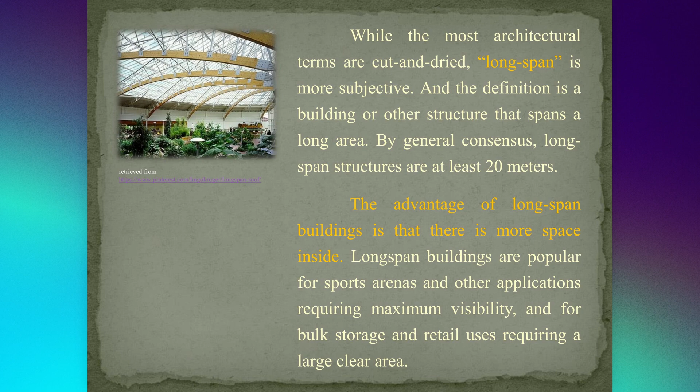Due to the nature of long-span construction, the construction materials, including framing members and trusses, are oversized and require special care for installation. Long-span structures may need bracing during craning and construction to keep the materials true. Before constructing a long-span structure, make sure the contractor and building installation crews have experience working with buildings of a similar size.

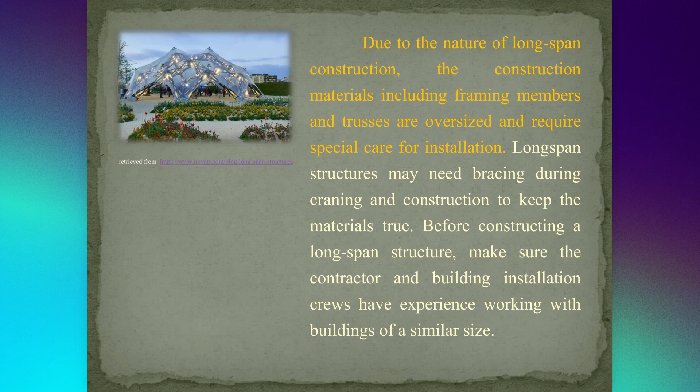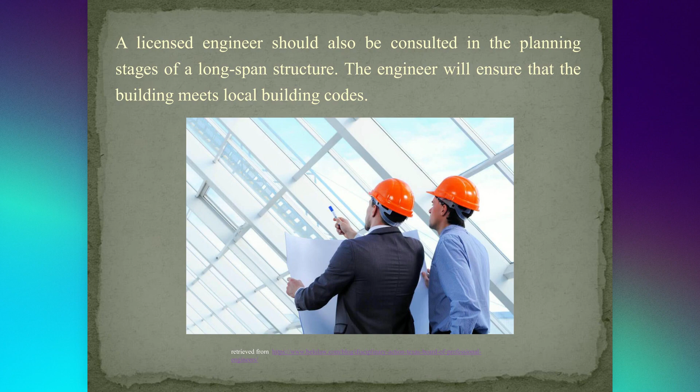A licensed engineer should also be consulted in the planning stages of a long-span structure. The engineer will ensure that the building meets local building codes. Designing long-span structures requires an obsession with stability. Certainly, the structure has to hold up its own weight. Just to span the required distance, a structure has to support the significant dead load.

But the complexity of a long-span design increases exponentially when snow load, wind load, seismic load, deflection, serviceability, and the dead weight of the floor or roof system are all factored in. Architectural appeal drives the design of such structures, but many factors, working simultaneously and in varying degrees, must be analyzed in long-span design.

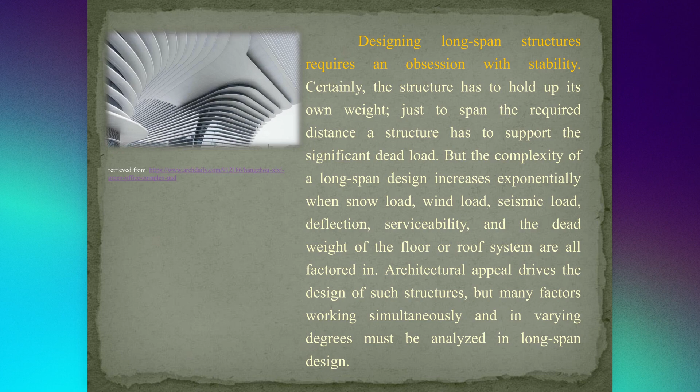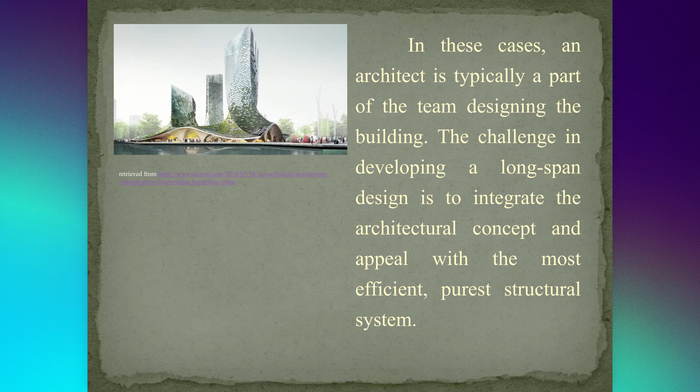In these cases, an architect is typically a part of the team designing the building. The challenge in developing a long-span design is to integrate the architectural concept and appeal with the most efficient, purest structural system. Relevant questions include: what are the site constraints? Should the pieces be pre-assembled or must the structure be stick-built?

What type of temporary support is needed? What is the nature of the field connections? What is the inherent stability of the elements during assembly? How will differential deflection impact the structure? How can load be transferred from temporary shores to the permanent structure?

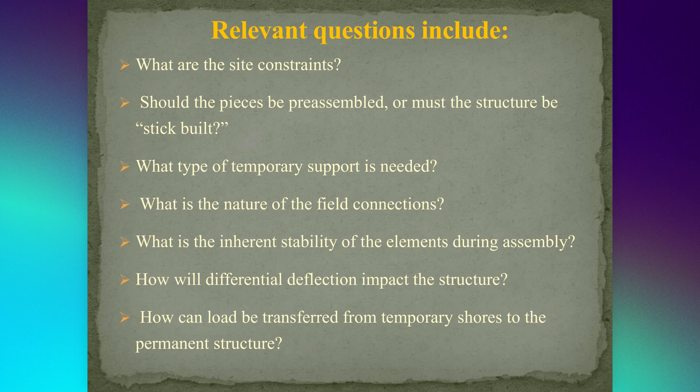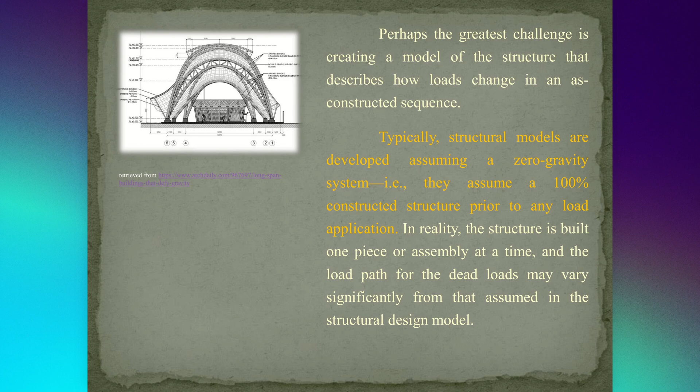Perhaps the greatest challenge is creating a model of the structure that describes how loads change in an as-constructed sequence. Typically, structural models are developed assuming a zero-gravity system, i.e., they assume a 100% constructed structure prior to any load application. In reality, the structure is built one piece or assembly at a time, and the load path for the dead loads may vary significantly from that assumed in the structural design model.

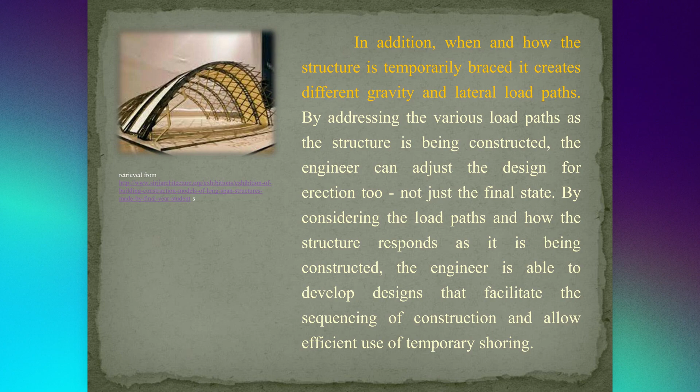In addition, when and how the structure is temporarily braced, it creates different gravity and lateral load paths. By addressing the various load paths as the structure is being constructed, the engineer can adjust the design for erection too, not just the final state. By considering the load paths and how the structure responds as it is being constructed, the engineer is able to develop designs that facilitate the sequencing of construction and allow efficient use of temporary shoring.

Addressing instability issues that occur during construction impacts member size, temporary shoring requirements, and construction sequencing, all of which have a significant impact on overall project cost and schedule. Certain construction materials are better suited for long-span structures. Long-span structures must be made of materials light enough not to require interior support, yet sturdy enough to withstand the pressures placed on the structure.

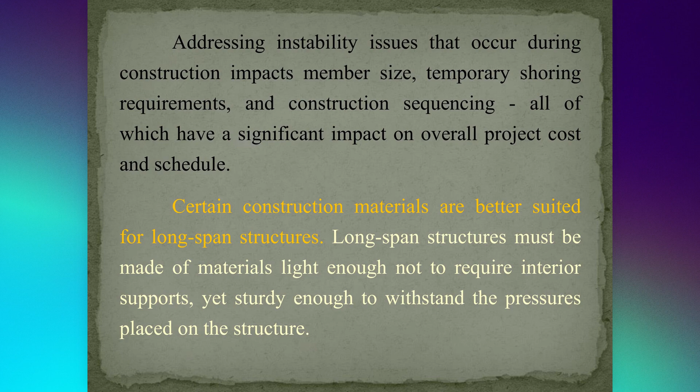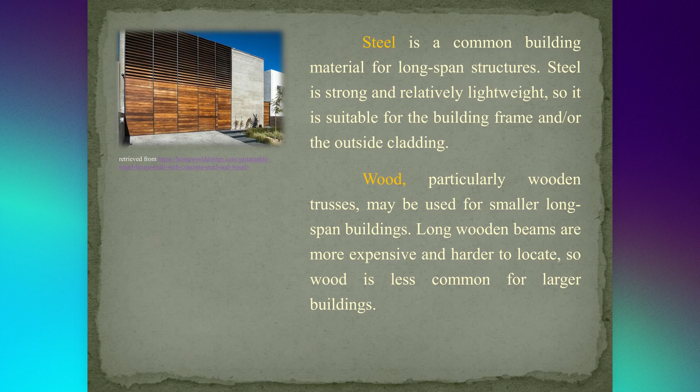Steel is a common building material for long-span structures. Steel is strong and relatively lightweight, so it is suitable for the building frame and/or the outside cladding. Wood, particularly wooden trusses, may be used for smaller long-span buildings. Long wooden beams are more expensive and harder to locate, so wood is less common for larger buildings.

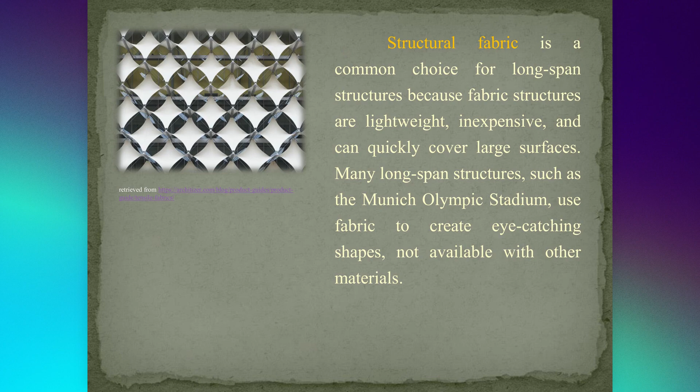Structural fabric is a common choice for long-span structures because fabric structures are lightweight, inexpensive, and can quickly cover large surfaces. Many long-span structures, such as the Munich Olympic Stadium, use fabric to create eye-catching shapes not available with other materials. Glass curtain walls on non-load-bearing walls provide a unique appearance and unite the inside and outside of the building.

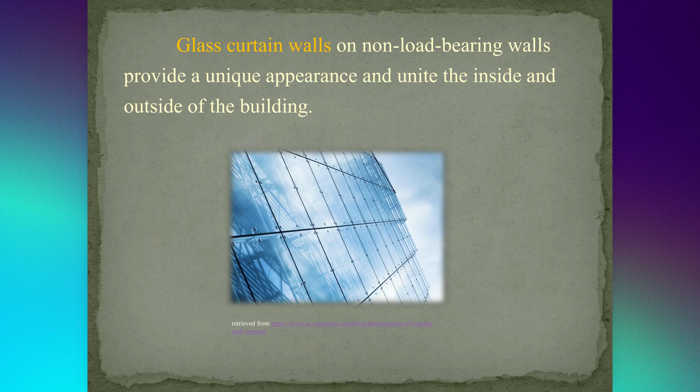There are a few important construction aspects to consider while building long-span structure-based bridges. Choosing the most appropriate method of erection. The choice of the method depends largely on the type of landscape, the depth of water bodies involved, and the distance to be covered. The type of foundation. This generally depends on the geotechnical condition of the region as well as environmental factors, such as the maximum wind speed and air pressure at the highest point.

The need for the construction of substructures. This can help to minimize the construction cost and time in a considerable manner besides enhancing the quality of the structure and workplace safety. The use of the right tools and technology. Since constructing bridges is quite unlike constructing buildings and other structures, the tools and techniques used here differ significantly and play a vital role in ensuring the safety and long life of the structure.

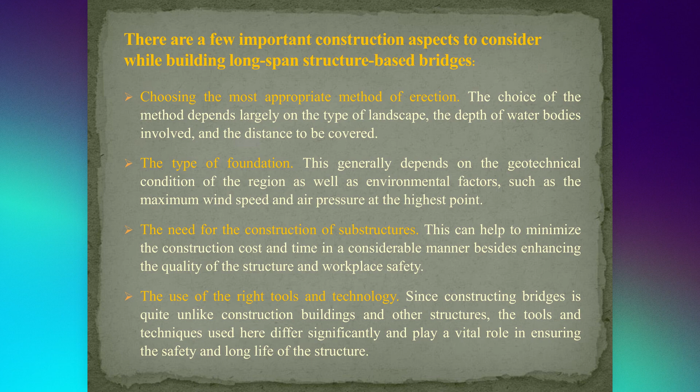It is also important to consider the geographical and environmental factors during bridge construction. This might include the presence of an older structure or the need to maintain the delicate ecological balance of a specific region or any other issues that need to be cleared with the proper authorities. Long-span structure construction is a lengthy process. Before embarking on a long-span construction process, be sure that you are using the right materials and the right installation team.